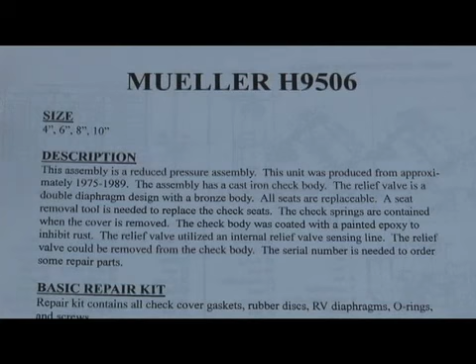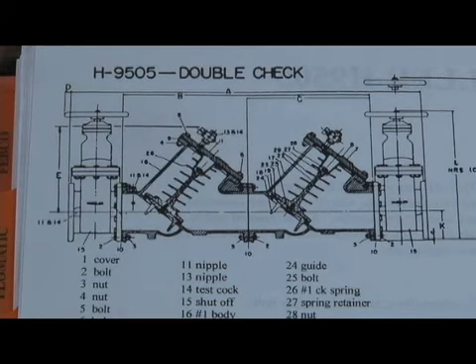The double check version has check valves pointing up at about a 45-degree angle, inlet check here, second check over here, outlet gate valve, inlet gate valve. Single access cover for each check valve, meaning each check has its own cover. Spring was contained when you disassemble it, so the spring would be contained when the cover came off. Spring tension did not have to be released for the average repair.

Here's a cutaway of the RP version. The relief valve was mounted underneath the check body. You can see a little breakdown picture right there on the side, and here's a larger view of it. The relief valve body had to be dropped from the check body for the repair, and this part where the assembly bolt was had to be unscrewed, and this part pulls off, which I can show you a relief valve and see what it looks like.

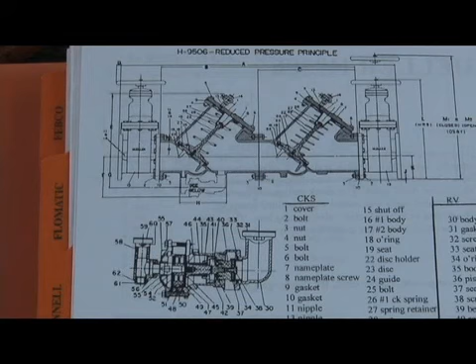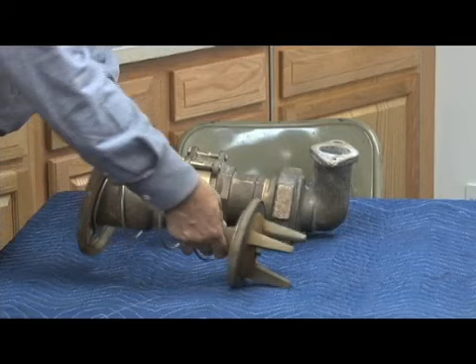This is the H9506. Let's take a look at some of the parts just to see what they look like, even though rubber parts are no longer available. Here's the check mechanism out of a 4-inch, and one bolt holds the disc into the disc holder. Spring tension was contained for the average repair and didn't have to be released. It was easy to identify because they were unique. They had a 3-fingered guide on the disc holder of the check assemblies.

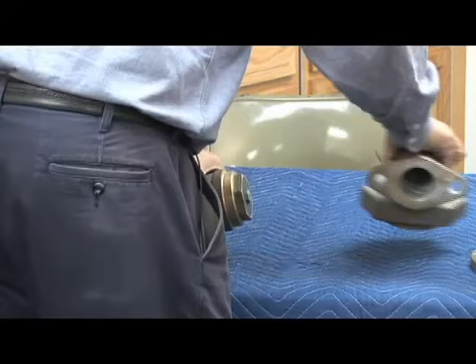The relief valve caused a lot of trouble because it was a relatively complicated relief valve, and actually it was very similar to the Cla-Val model CDHS-14, which had the 3 different Belloframs. But once you had this dropped off the body, this outer section had to be unscrewed, which had a high pressure sensing line, so it could be disassembled. Assembly bolts here, assembly bolt in the middle. And anyway, that's the Mueller relief valve that they utilized for that one. Very similar, as I said, to the Cla-Val CDHS-14.

Since rubber parts are no longer available, this is what it looks like, though, if you ever see one. And that's the Mueller RP or double check version H9505 and H9506 backflow assemblies.

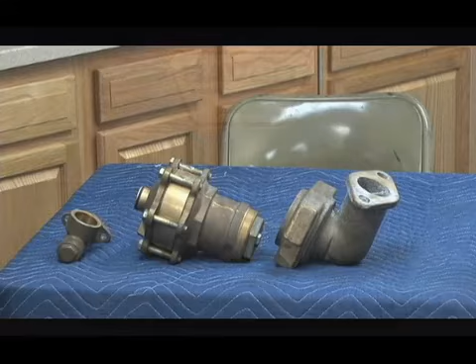You may run across some backflow assemblies with the name tag Neptune on them. Specifically in the double check, you may see a 550, reduced pressure assembly 575. You may see pressure vacuum breakers model 720, 701, or 711. Neptune made these assemblies, and the pressure vacuum breakers 720, 701, and 711 they purchased from SMR, or Surgical Mechanical Research Company. They made them for a while, but they sold them off to a company that bought them out, which was Wilkins, who bought them with the 550 and 575. So on the pressure vacuum breakers 701, 711, 720, you may see SMR, you may see Neptune, and it's currently produced as the 720 version under the Wilkins name.

The model 550 and 575 you may see under the Neptune name, or you might see it under Wilkins, who produced it for a time period before they discontinued it on new models. Anyway, Neptune did make backflow assemblies in those models. To see the corresponding version of it, you can see the Wilkins assemblies and the SMR version, and SMR versions for the PVB.

The next assemblies we're going to discuss are the Orion series. We'll talk about this in some specific sizes and models. The first is the model BDC, which was their double check assembly, produced in sizes 3/4, 1, 3-inch, and 4-inch. Originally it was produced under the Toro name, and Toro began making them originally and then sold to Orion later on. And Orion produced them for a while and actually sold them off to Febco.

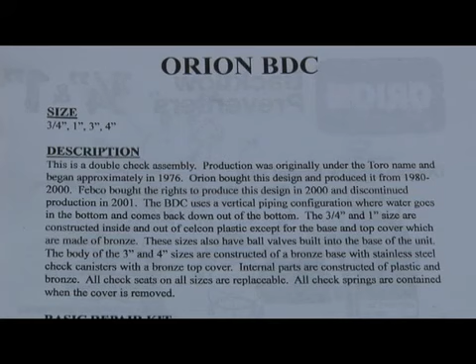Febco bought them in about 2000, 2001-ish area and they never actually sold them under the Febco name, but Febco bought the rights to it from Orion and discontinued production of it.

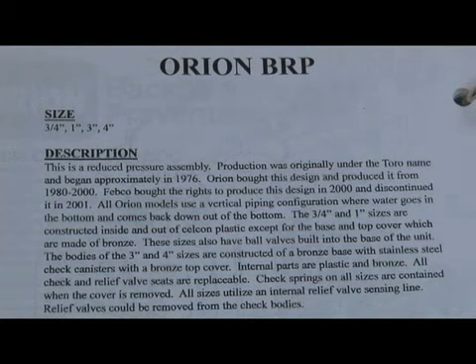The RP version was known as the model BRP, same sizes: 3/4, 1, 3, and 4-inch. Here's the BDC in sizes 3/4 and 1-inch.

It was unique in that it had an up and down piping configuration. Water came up from the bottom, went through the canisters, through the top, and back down through the bottom. They had an integral ball valve built into the body, so the shutoffs were a ball valve shutoff built into the body itself.

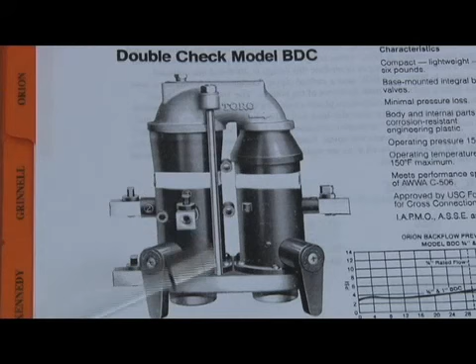The BRP, same thing, up and down piping, the side view of it. You can see the relief valve off to the side of that unit.

The 3 and 4 inch had that same up and down piping configuration as we saw in the small 3/4 and 1 inch. The canisters, instead of being plastic like the 3/4 and 1, the 3 and 4 inch were a stainless steel canister with a bronze top and a bronze base that it was built to, with long studs going between it to hold it together.

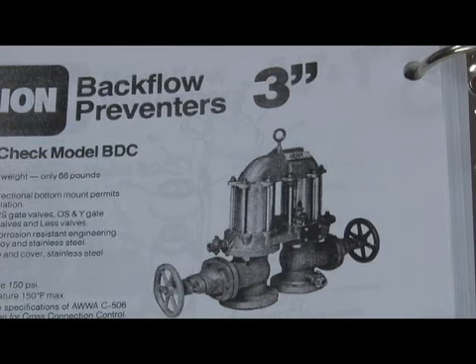The RP version had the relief valve mounted to the side of the check body. It looks like it was mounted to the gate valve, but it was actually mounted to a little bushing on the top, just below the test cock on the body itself. But anyway, the relief valve was mounted on the side here.

The same canisters that we saw in the 3 inch, so the 3 and 4 inch had that. Access off the top to the check assemblies, relief valve cover from the side.

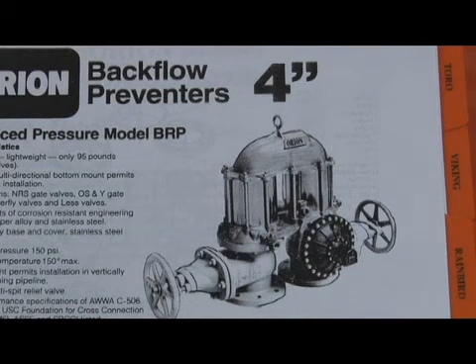Rubber parts are no longer available, but let's take a look and see what they look like just so we know. Here's a cutaway version of the BRP. You can see the cutaway of the check assembly here, but the main thing I want to show you is these ball valves, which were the shutoffs for that unit.

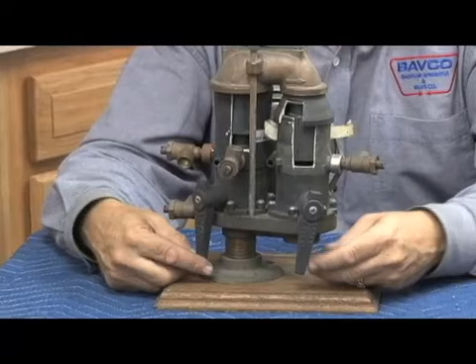They were built into the backflow assembly itself, the integral ball valves. The relief valve was mounted off to the side, as you see here, with a stainless steel clamp is how it was attached. But to disassemble this unit on the 3/4 and 1, there were 2 bolts on the top. Take the 2 bolts off, nuts excuse me, and the cover would come off from the top.

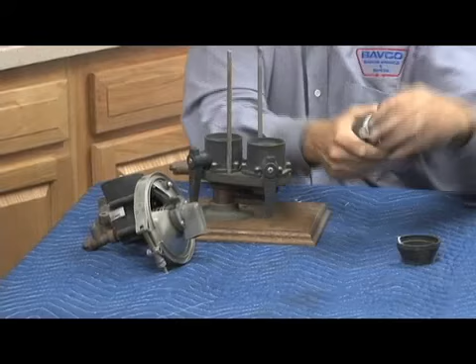First check assembly with the relief valve attached, second check assembly like this. Top part was the check seat. Check assembly, one screw held the disc into the disc holder. Reassembly was just the reverse, but since there are no more rubber repair parts available, that's where I wanted to show you what it looked like. That's the 3/4 and 1 inch model BRP.

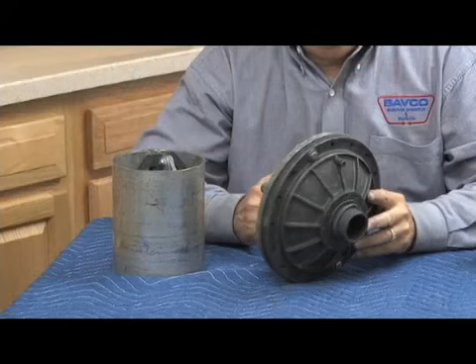Here's the 3 and 4 inch relief valve assembly. Instead of the stainless steel clamp on the outside, it did have bolts. It was attached by bolts to the check body with an O-ring seal. But I wanted to show you the checks because they're kind of unique.

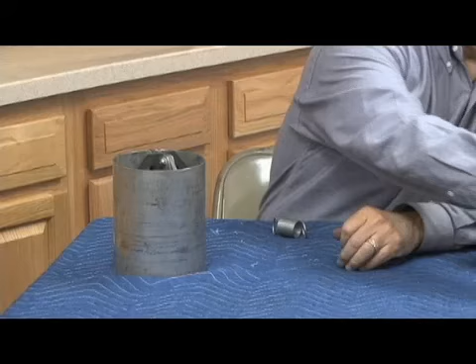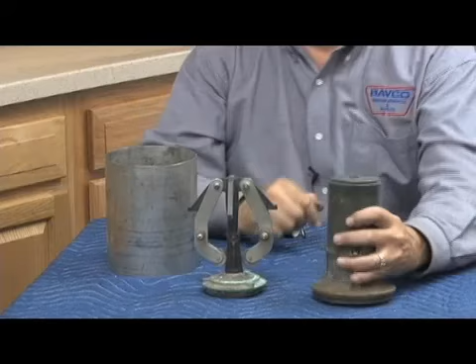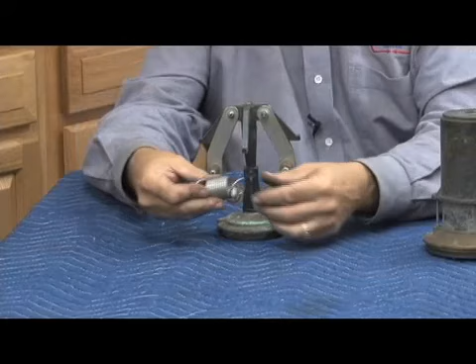This is the check mechanism, and what it used to utilize was an extension spring that stretched across between these 2 points. Now, we've all heard for years that there has to be a heavier spring on the first check than the second check of an RP. That is not true. The correct term is there has to be a heavier spring load on the first check of an RP than the second check.

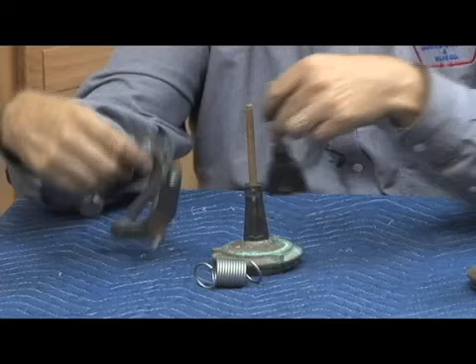This is the one backflow assembly that had the exact same spring in the first check as it did in the second check, and it had an extension spring. But what they used to do was, whether it was a first check or second check, they would have a larger cam on the first check and a smaller cam on the second check. That meant that with the second check, it would stretch a little bit, but with the first check cam, it stretched a lot more. So as a little footnote of history, here's one RP that had the same springs in the first check and the second check, but achieved a different spring load through the cams.

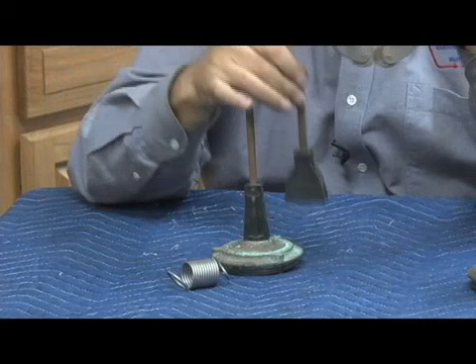And that's our Orion BDC and BRP reduced pressure assembly. Rubber parts are no longer available.

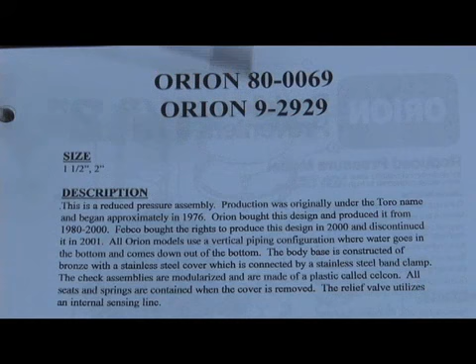Next assemblies we're going to discuss from the Orion manufacturer is the model 80-0069 and 9-2929 reduced pressure assemblies. Orion in the sizes 1.5 inch and 2 inch had a separate model number for each model. In other words, the 9-2929 was a 2 inch, 80-0069 was the 1.5 inch. The double check models were the 80-070 and the 9-2930.

Production was originally begun with the Toro name. Toro made this first and then sold it to Orion, and Orion produced it. They made it for a few years and sold it off to Febco around 2000-ish, 2001, somewhere around there, and Febco did not make repair parts for them. So once they bought them from Orion, rubber parts were discontinued that Orion had produced.

This series had a very unique design. Just like the 3/4 and 1 inch, water came up from the bottom and came out through the other side. It didn't have an integral ball valve, but had gate valves that were mounted by a clamp on the bottom. There's a single clamp bolt that held the 2 shutoff valves to the base of the backflow assembly. This was before the requirement for a ball valve or resilient seated shutoffs, although these were a resilient seated gate valve, but they did not hold pressure very well.

The problem became if you ever had to change shutoffs on this, you'll see a lot of people would put a secondary shutoff before this, because this clamp that was on the edge of this shutoff was adapted to fit into that backflow assembly, and you couldn't easily just change this gate valve without changing that. So a lot of people left this bad gate valve in here and would put a secondary one before or after, depending what they were changing. A stainless steel clamp held the whole thing together. It was a stainless steel cover, kind of unique and very compact design in how it was built.

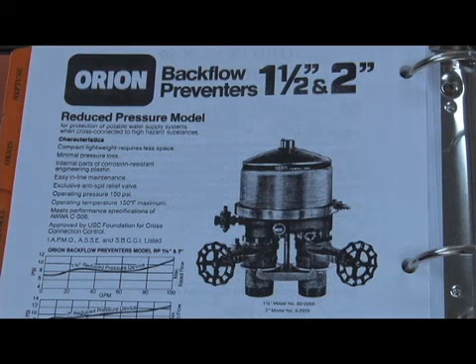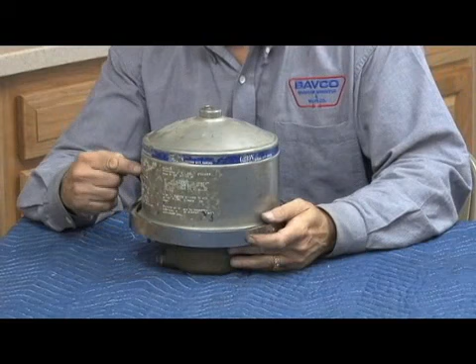Let's go ahead and look at one real quick, even though there are no rubber parts available. Here's the RP version. Here's the relief valve discharge right here. And there's the clamps where those shut-off valves would be pushed up there, sealed by that bolt in the center. Kind of unique. They did have disassembly instructions on the back of this, because looking at this, a lot of people weren't sure exactly how it came apart. But how it came apart was this stainless steel clamp right here. You'd loosen this nut, and once you loosen the nut, the clamp would come off from the top.

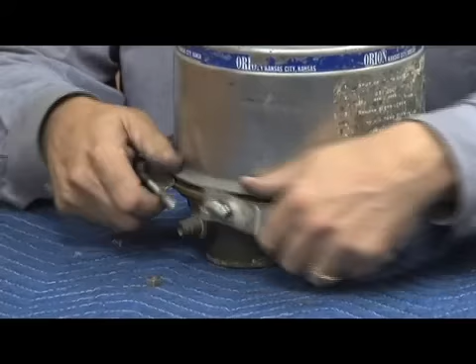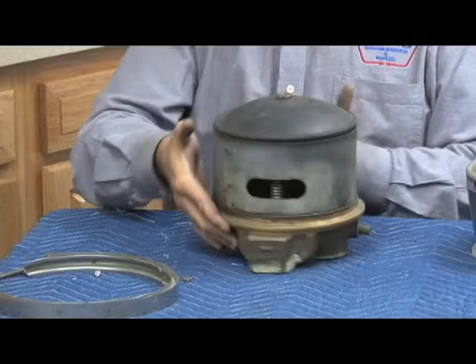Now, at this point, your first reaction is just to pull up on the cover. If you did, you'd end up breaking parts inside of it. You had to remove this air bleed, because that would release air to the top, and once you pulled that out, now it would come off very easily. Again, once you got the cover off, still not sure what you're looking at. If you'll notice there's a small little clip right here. You would squeeze the outside of this diaphragm retainer and pull up on it, and the relief valve stem would come out here, and the relief valve hose, which was attached right here.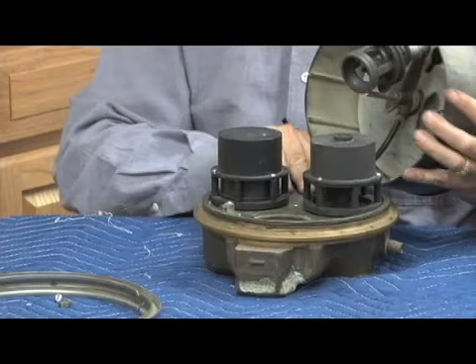The relief valve sensing line was internal, meaning inside the backflow assembly. The check modules came out in one piece like this. They did have a rubber repair kit to rebuild them. They could also buy the checks separately, but they were a modularized check. And to rebuild the relief valve, you actually had to cut the relief valve hose and disassemble it. Relief valve seat, which pushes in here, and there's a relief valve disc. There were 2 discs and 2 seats, similar to what we saw in the Hersey series of backflow assemblies, where it had a double relief valve disc and a double relief valve seat.

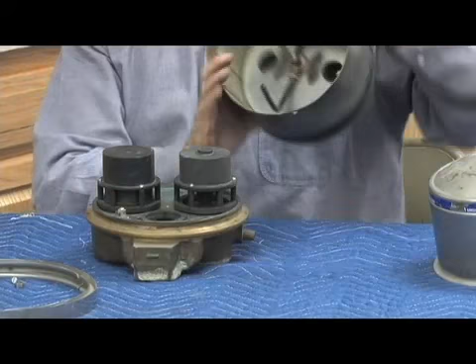But anyway, the 9-2929 RP 2-inch version is what you see here. No more parts are available. If it does have to be repaired, it will have to be replaced. But I wanted you to see this little footnote valve, because it's a little different than what we're used to seeing. So this is the 9-2929 Orion series of RPs.